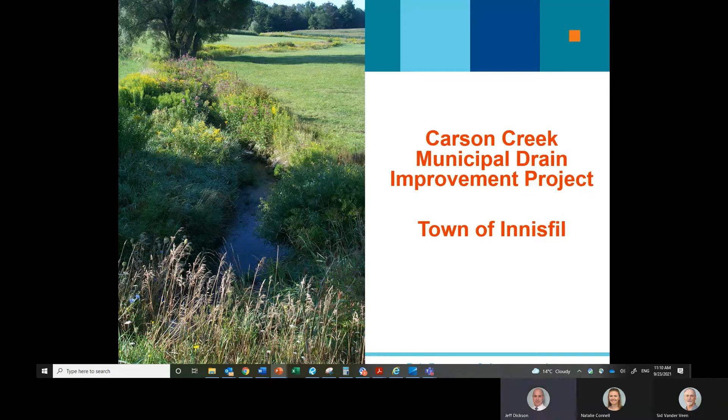Therefore, in lieu of an in-person on-site meeting for Carson Creek, this digital online presentation is being provided for affected stakeholders to review. Furthermore, soliciting comments and feedback from stakeholders within the preliminary and yet to be verified watershed will be part of the process and will be expanded upon later in this presentation. I will now give you a little bit of an introduction to the Carson Creek project.

What you see before you is a plan of the drain and the watershed. As representatives for Burnside, the engineering firm appointed to prepare a new drainage report for Carson Creek, we have been and continue to work with the town staff in response to our September 2019 appointment by the council of the town in accordance with Section 78 of the Drainage Act to prepare a new report for Carson Creek.

Carson Creek itself is located entirely within Concession 4, Geographic Township of Innisfil, now known as the Town of Innisfil. Its upstream end commences at the south side of Killarney Beach Road, at the north limit of Lot 18, Concession 4, approximately midway between Yonge Street and 20th Side Road.

It extends primarily to the east, somewhat to the north, through Lot 18 and then lots 19 and 20, and passes under 20th Side Road. It continues to the east through the wooded area on Lot 21 between Green Street and Simkin Court before it passes under the Metrolinx line.

After doing so, it continues east along the south side of Walter Street and passes under each of Corner, Gilmore, Carson, and Ferrier Avenue, then Ewart Street, and eventually under Berry Avenue to its outlet into Lake Simcoe.

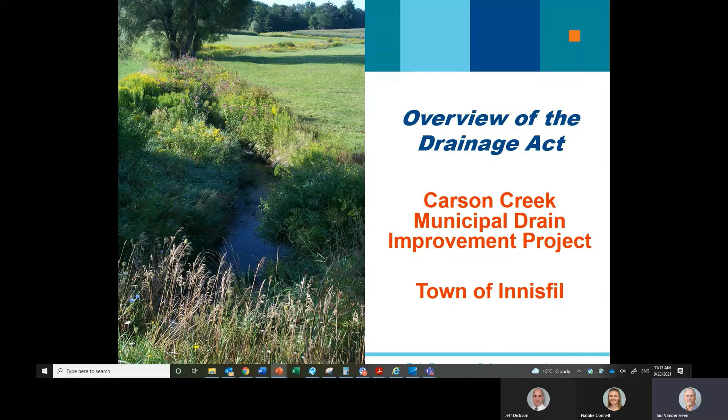The purpose of this part of the presentation is to provide you with an overview of the Drainage Act and municipal drains in general, as well as the roles, rights, and responsibilities of municipalities and all involved property owners.

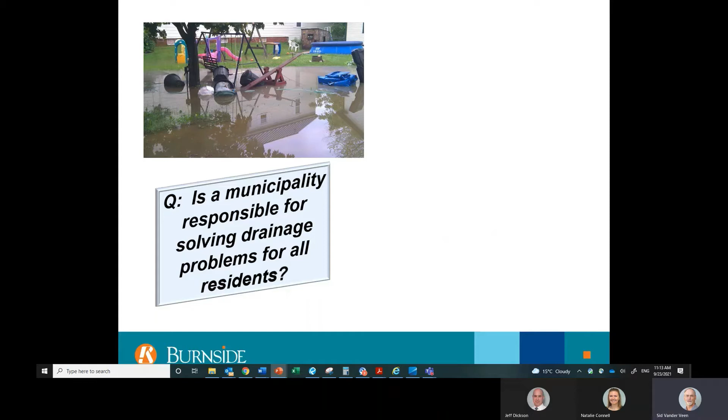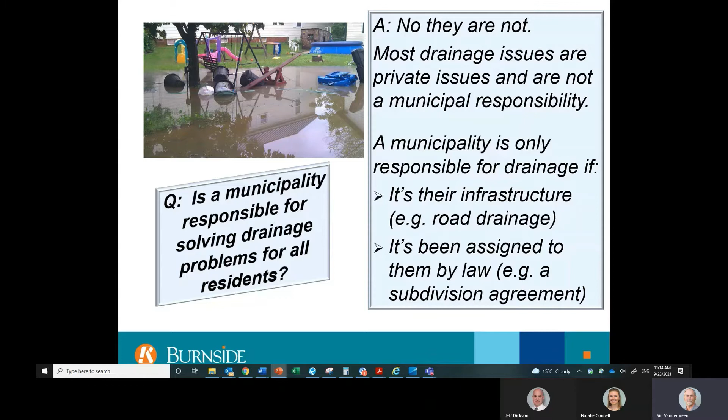First of all, is a municipality responsible for solving drainage problems for their residents? Many people believe that it is their responsibility, but that's actually incorrect. Municipalities are only responsible for resolving drainage issues on their own properties or relating to their own infrastructure, such as the town office, town roads, or any of their other properties. They are also responsible for managing any drainage issues that have been assigned to them through a law such as the Planning Act, the Municipal Act, or the Drainage Act. But private drainage issues are not their responsibility.

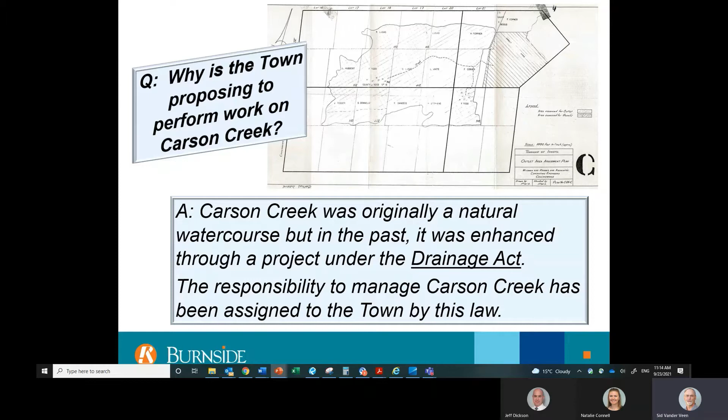Then why is the town proposing to perform work on Carson Creek? Well, Carson Creek was originally a natural watercourse, but in 1961 it was enhanced or improved under the Drainage Act. So connecting back to the previous slide, the town is proposing to do work on Carson Creek because the town has been assigned responsibility for the management of this drainage system through the Drainage Act.

What's the Drainage Act and what does it do? Ontario has an abundance of precipitation and that results in our streams, lakes, and rivers, but often it also results in drainage problems. To solve these problems, cooperation between neighboring property owners is usually required, and this can sometimes be difficult to obtain by agreement. The Ontario Drainage Act provides property owners experiencing these problems with a process or mechanism to solve them, even when cooperation with neighbors is not possible.

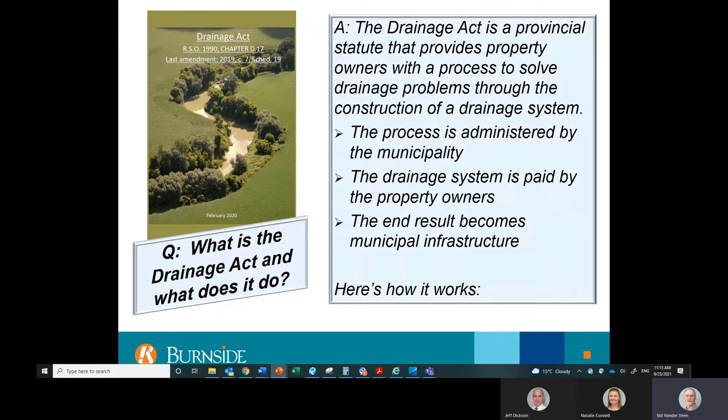The process is administered by the local municipality, and the cost of any system that is constructed is shared by all the property owners in the watershed.

What is a watershed? A watershed is an area of land that drains or sheds water into a specific water body. The water in Carson Creek is made up of overland flow and groundwater contributions. Because of the requirements of the Drainage Act, all lands and roads in the watershed of Carson Creek Municipal Drain will be contributing to any work performed on the drain.

What is the Drainage Act process? The process under the Drainage Act to establish a new municipal drain starts with a petition that must be signed by one or more property owners and is submitted to the municipality. The municipality would appoint an engineer who conducts a site meeting with the property owners and then surveys the lands. The engineer designs the drain, writes a report that provides specific details on the drain, as well as drawings.

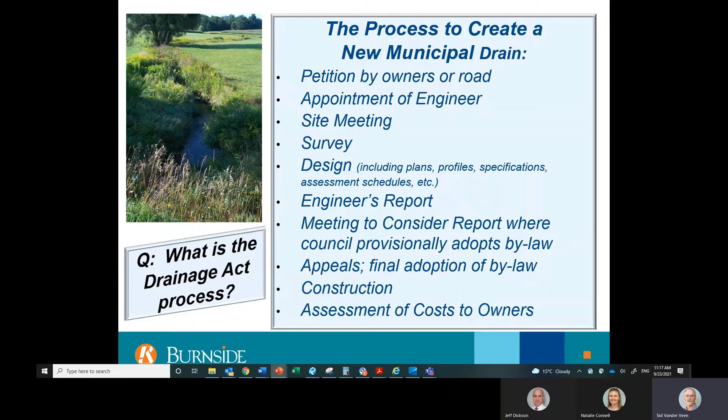The report is submitted to the council, and council holds a meeting to consider the report. All owners have the right to appeal all aspects of the report. After the appeals are dealt with, the municipality passes a bylaw adopting the report. The drain is then constructed, and after the final costs are calculated, cost assessments are levied to individual property owners. Again, Carson Creek was established as a municipal drain in 1961 through this process.

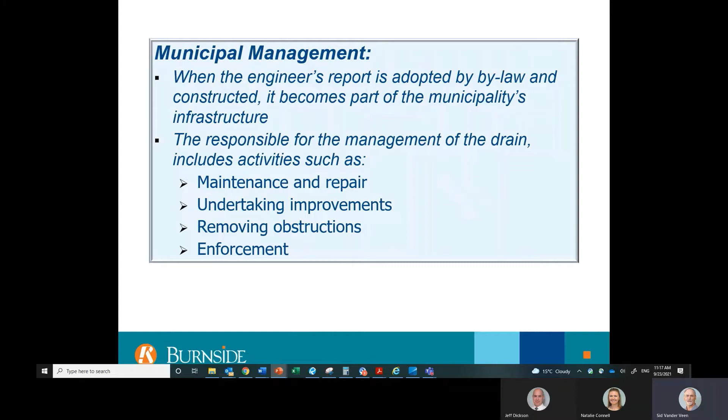Once constructed as a municipal drain, the Drainage Act also indicates that this drainage system becomes municipal infrastructure. The municipality is responsible for managing the drainage system, even those sections of drain located on private land. In fact, in certain circumstances, the municipality can also be held liable for damages if they don't perform their duties.

Based on inspections done in 2019, the town identified several problems with the Carson Creek drain. The drain appears to be adapting to flows, which is causing channel widening, erosion, and bank instability. In some areas, flow is also being restricted by fallen trees, debris, log jams, or vegetation growth in the channel. The eroded sediment is being transported downstream and deposited into Lake Simcoe, and this is an ongoing concern of residents, the Lake Simcoe Region Conservation Authority, as well as the town council and staff.

As a result, the town has decided to make improvements to the Carson Creek municipal drain. The process for making improvements to an existing municipal drain is very similar to the process for establishing a new municipal drain and will be detailed in the slides to follow.

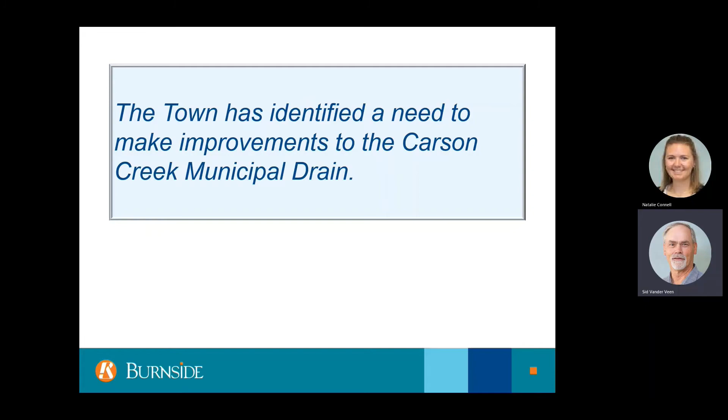An improvement is any modification or addition to a municipal drain intended to increase its effectiveness. Some examples of improvements might be replacing a pipe, increasing the capacity of an existing drain, rerouting a section of an existing drain, or adding environmental protection features to a drain.

Improvements or modifications to a drain can only be authorized by municipal council through a project undertaken under Section 78 of the Drainage Act.

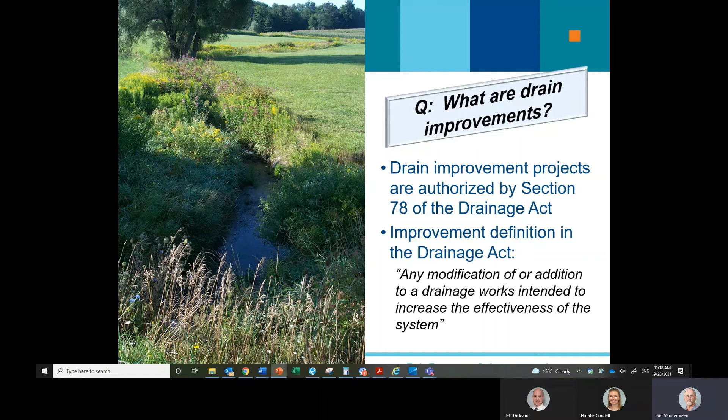Step 1 of the improvement process is project initiation. While council always initiates improvement projects, the need for the work is usually brought to council's attention in one of two ways: first, one or more property owners identify a need for the improvement of a drainage system, or second, the town's drainage superintendent identifies the need.

Step 2 is agency notification. Once council has decided to undertake a drain improvement project, the local conservation authority must be notified of the project initiation. The town of Innisfil has already completed these steps.

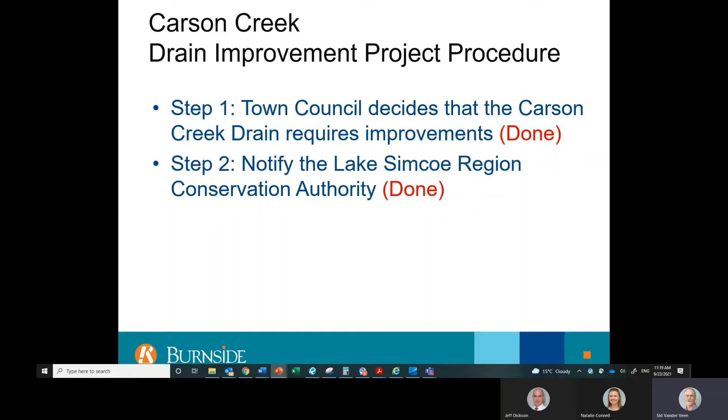Step 3 is retaining an engineer. Through a competitive process, RJ Burnside and Associates Limited was retained by the town of Innisfil, and Jeff Dickson is the engineer from Burnside leading this project. Jeff has several decades of experience working on drains.

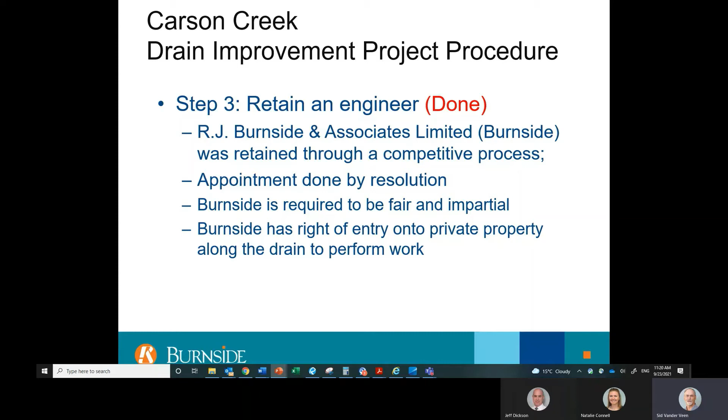The Drainage Act gives Burnside staff the right of entry onto private land to perform any necessary work. The Act also requires Burnside to be fair and impartial in performing their duties under the Drainage Act.

The purpose of the site meeting, step 4, is to provide participants with information on the Drainage Act, to provide background on the drainage project and the issues, and to obtain comments and feedback from the property owners, road authorities, and utilities. This meeting is usually held at the site of the drainage problem or at an off-site location if it provides better and safer conditions.

At the site meeting stage, no design work has been completed, and no information is available on the drain design or on cost sharing. The site meeting, as Jeff described earlier, was initially scheduled for March 2020 but was postponed due to COVID restrictions.

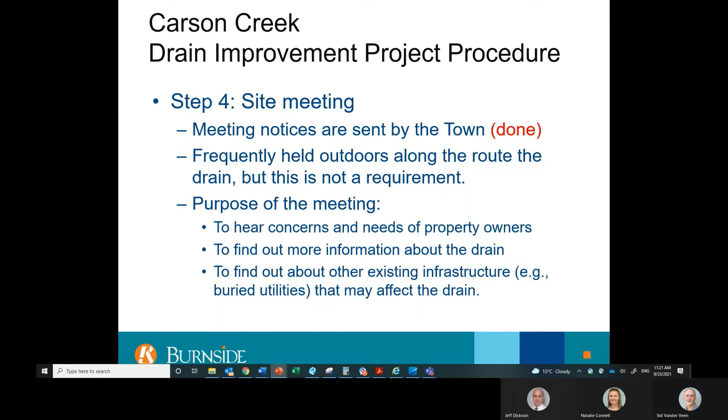Step 5 is the survey. For Carson Creek, some drone and manual survey work has already been completed in the fall of 2019. However, more field work may still be required.

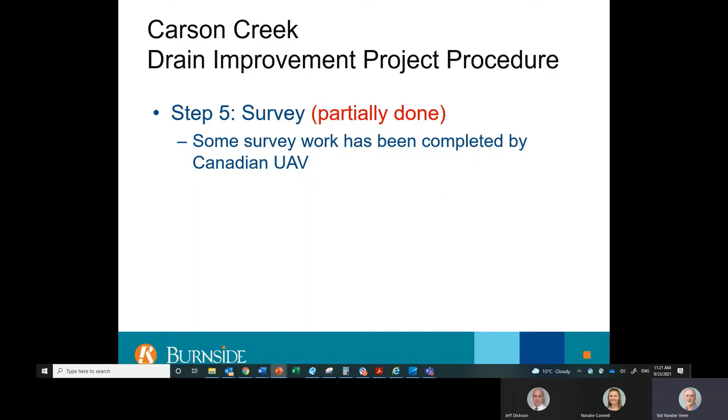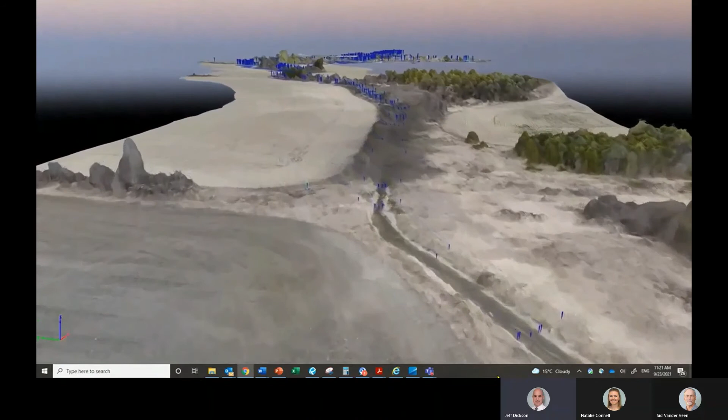The following is a video of the drone survey work. This video begins at Killarney Beach Road and is moving from upstream to downstream, or from west to east. You will notice the green is the trees located in the watershed, and the blue points are survey points where data was collected.

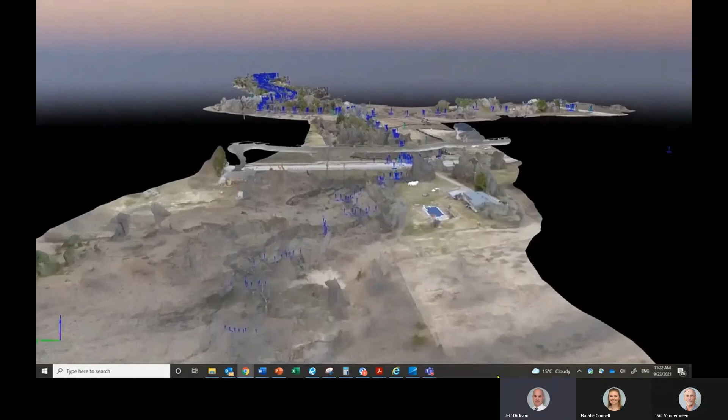As we move downstream, we're now approaching 20th Side Road, and you will see it coming up in the middle of the screen. We're now circling around 20th Side Road, and then we continue east.

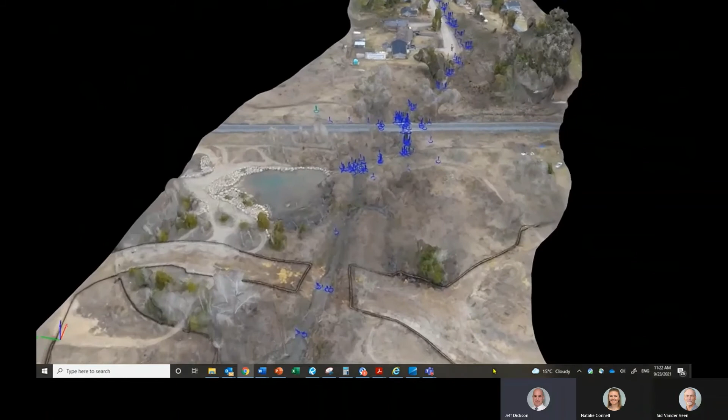We're now approaching the Metrolinx line, and you will see it in the middle of the screen now, and a zoom in on it of the rail tracks.

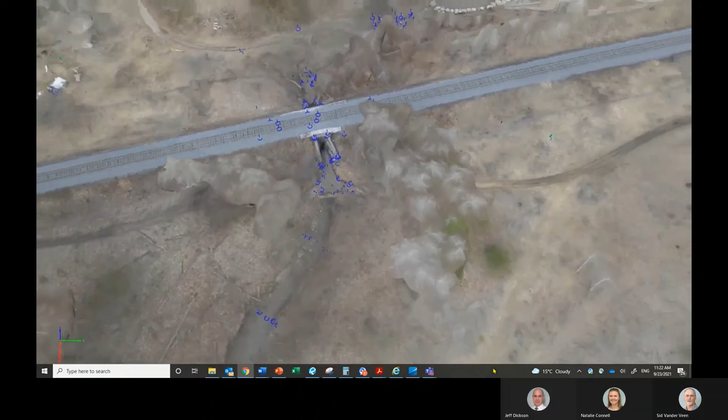You now see George Street, and then we pass under Corner, Gilmore, Carson, and Ferrier Avenues. We pass under Ewart Street, and eventually Barry Avenue, and through to the outlet at Lake Simcoe.

A draft report is completed after step 5, the survey work. After completion of the field work, the data is analyzed and a solution is designed. The objective is to develop a solution to resolve the drainage issues in consultation with the regulatory agencies and in compliance with all environmental law, and listening to the public.

The draft report will also include an estimate of the total cost of the project and will show how the costs are proposed to be distributed amongst the property owners. It will also show the owners that need to be compensated for the use of land or provide them with damage allowances.

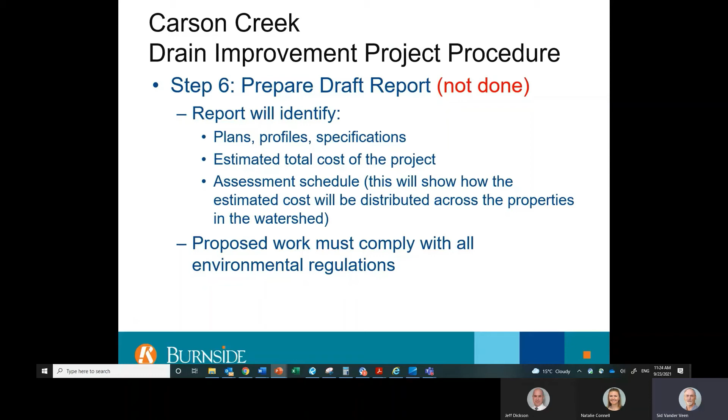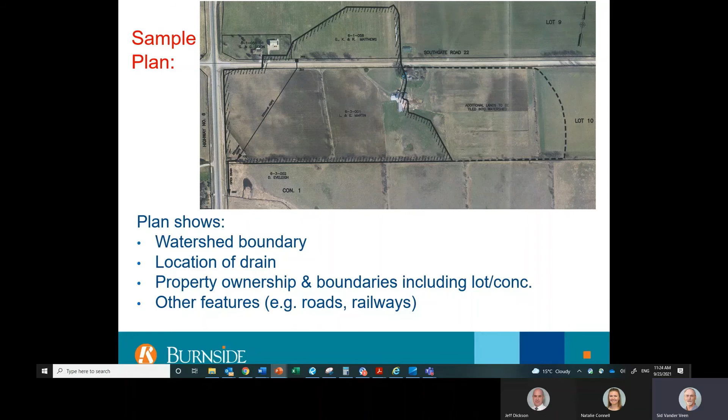This is a typical drainage plan that shows the watershed boundary, the location of the drain, the form of the drain, which can be channel, a pipe, or a combination thereof, property ownership and boundaries, including lots and concessions, property roll numbers, and other features such as roads, railways, and woodlots.

Drainage systems under the Drainage Act are user pay, so the costs of the Carson Creek project will be shared by the more than 1,000 affected properties and roads in the watershed of the drain, but it will not be in equal shares.

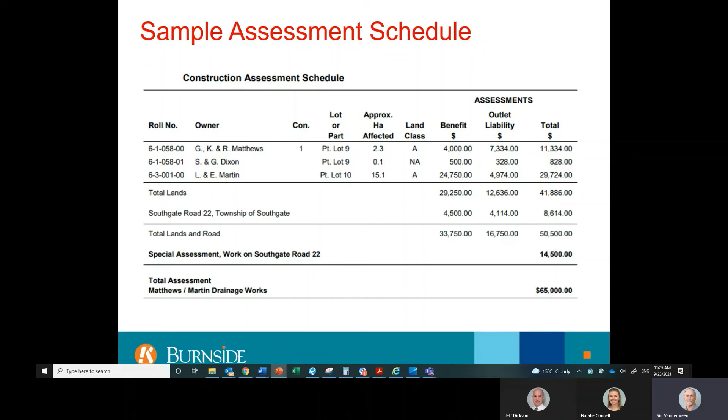The Drainage Act identifies the factors that guide cost sharing, which include the land that actually benefits from the drain, which are usually the lands in the immediate vicinity of the drain, the area of land in the watershed that's contributing to the runoff, the use of the land, the proximity of the drain to the property, and the length of drain used. There are often also special additional assessments that are levied to road authorities and utilities.

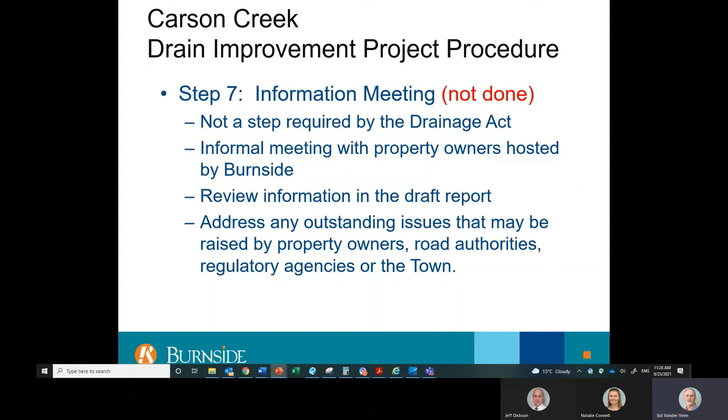After Burnside completes a draft design, an information meeting is usually held in step 7. This is not a step required by the Drainage Act, but it provides an opportunity for the Burnside team to present and discuss the results of the proposed design with the property owners in a less formal setting before the Drainage Act process resumes.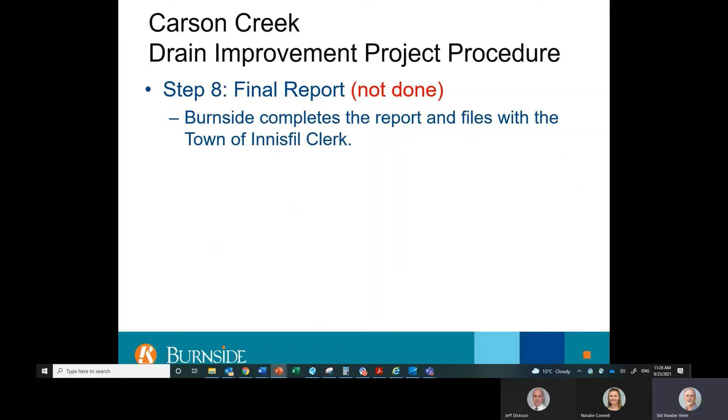In step 8, the Burnside team finalizes the report. Comments received through the information meeting are considered and incorporated as appropriate into the final report. The final report is then sent to the municipality, and a date for the council meeting to consider the report is set, and a notice of this meeting and a copy of the report is sent to all assessed property owners in the watershed, all involved roads and utilities, and agencies such as the Lake Simcoe Region Conservation Authority, Ministry of Natural Resources and Forestry, and the Ministry of Agriculture, Food and Rural Affairs.

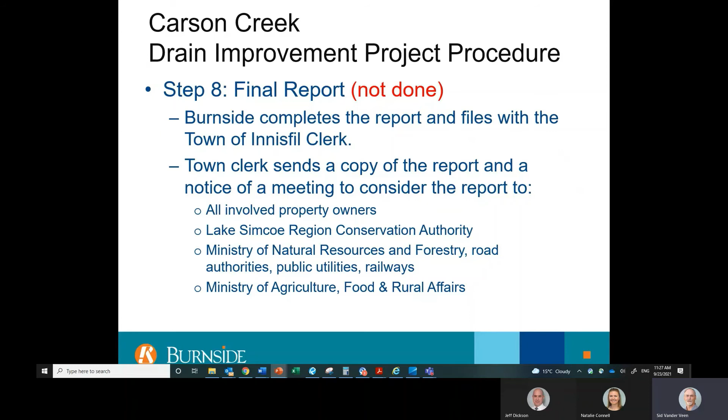Step 9 is the meeting to consider the report, which is chaired by the head of council. The Burnside team will give an overview of the proposed project. Meeting participants can ask questions and express concerns. They can also try to influence the decision of council. However, this is not the opportunity to appeal the design or the cost sharing of the project. Only council makes decisions at this meeting.

At the conclusion of the meeting, council can choose to: 1, give 2 readings to a bylaw provisionally adopting the report, or 2, refer the report back to the engineer for modifications, or 3, stop the project.

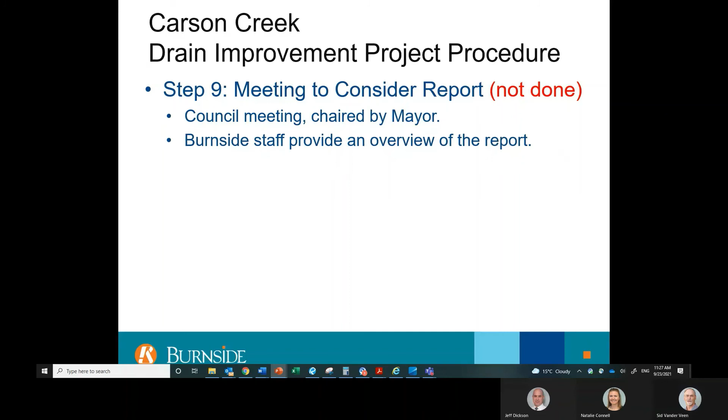The appeal stage, step 10, begins when the town sends a copy of the provisional bylaw and a notice of the Court of Revision to all assessed property owners. The Court of Revision is a municipally appointed appeal body that hears appeals on assessment only. If owners think their share of the cost is too high or too low, an appeal to the Court of Revision can be filed with the town.

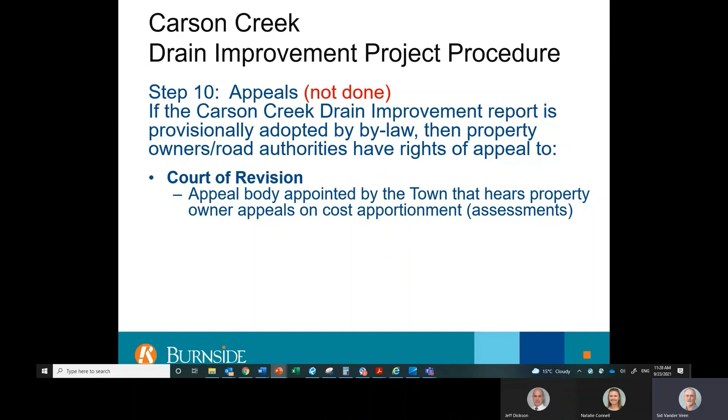There are also 2 provincially appointed appeal bodies. The tribunal is a panel who hears appeals from the decision of the Court of Revision and appeals on technical matters. The referee is an individual who hears appeals of a legal nature.

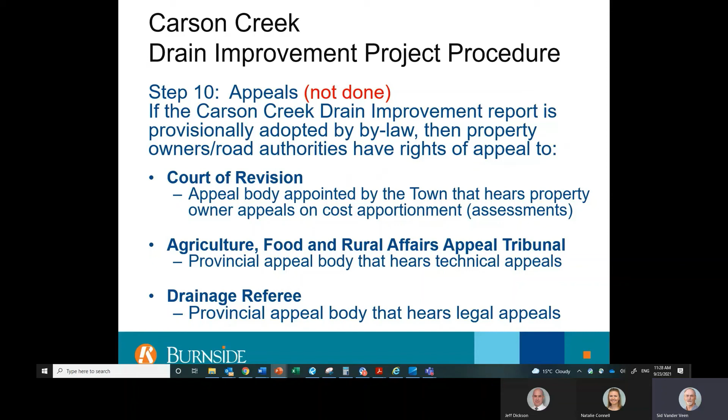After all appeals have been dealt with, the town gives 3rd and final reading to the bylaw. This authorizes the construction of the drainage system. The town then tenders the project and hires a contractor to perform the work. The work is performed in accordance with the adopted report and in compliance with all permits and approvals.

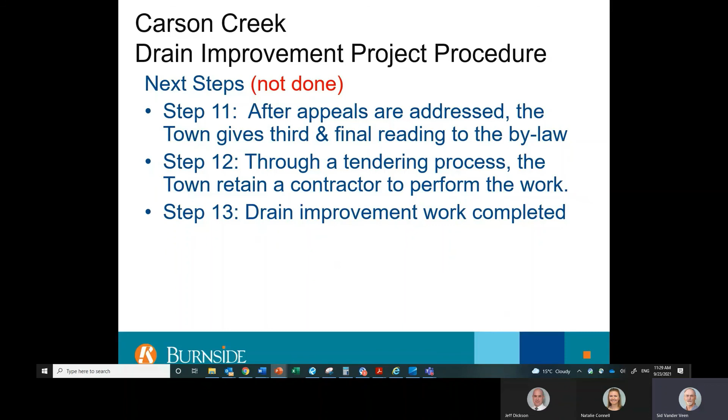The Ministry of Agriculture, Food and Rural Affairs has a program that provides a 1/3 grant towards assessment on agricultural land only. The town would apply to OMAFRA for the payment of these grants. To be eligible for these grants, your property must be assessed or taxed at the farm property class tax rate. For more information on this program, Google Farm Property Class Tax Rate Program.

The town then levies the remaining cost to the involved property owners. This levy has the same status as property taxes.

This was a summary of the Drainage Act process as it applies to the Carson Creek project. For more information on the Drainage Act or the Carson Creek project, your Burnside contact information will follow. Natalie Connell will now provide a summary and concluding remarks.

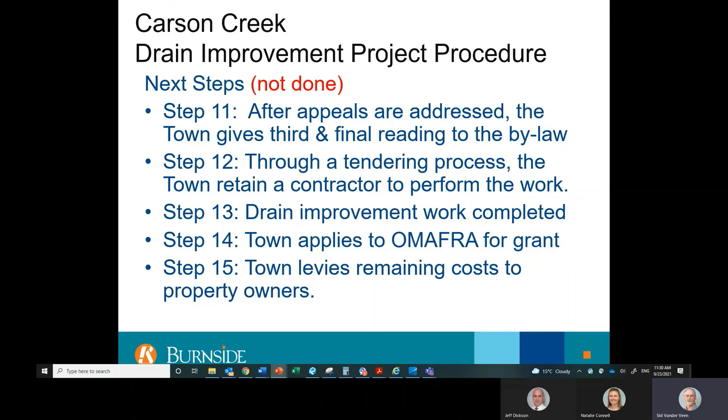Thank you, Sid, for that presentation. So as we move forward with our process in preparing a report for the Carson Creek project, as Sid outlined, we would like to get feedback from you as the stakeholders.